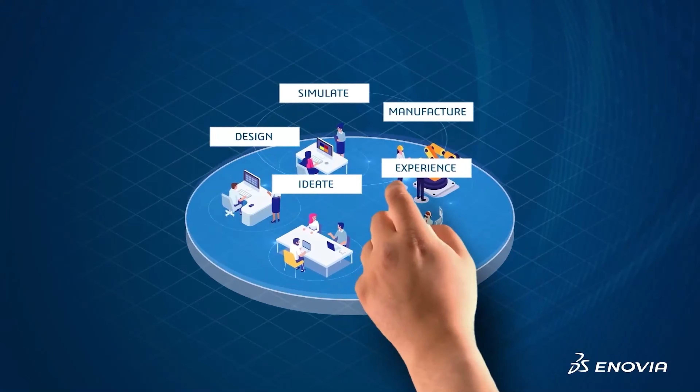With those intelligent links in place, each of your teams, whether that's mechanical or electrical design, software, manufacturing or simulation, work from a common product definition, which can help you improve quality, reduce costs, and deliver sustainable innovation. ENOVIA in the 3D Experience gives you an accessible way to get started in the world of data management on an industry-leading solution. It's worth mentioning now that the 3D Experience isn't your typical PDM solution. It's an all-encompassing hub of business applications that PDM's just a small part of.

With the platform, you'll have the potential to expand into other areas, all within the same solution as your business needs evolve and change over time. You'll be able to leverage your data with requirements management, project management, business analytics, simulation and production planning as just a few examples of the functionality that'll be at your fingertips. But before you can start taking advantage of all of that, what we'll focus on in this demonstration is an overview of the data management solution itself. That's the usual starting point for businesses like yourself moving to the 3D Experience.

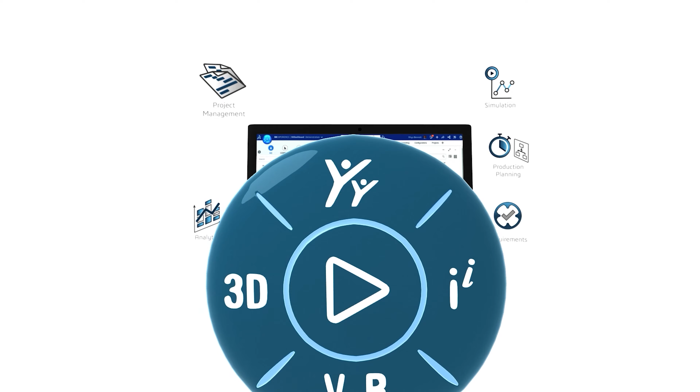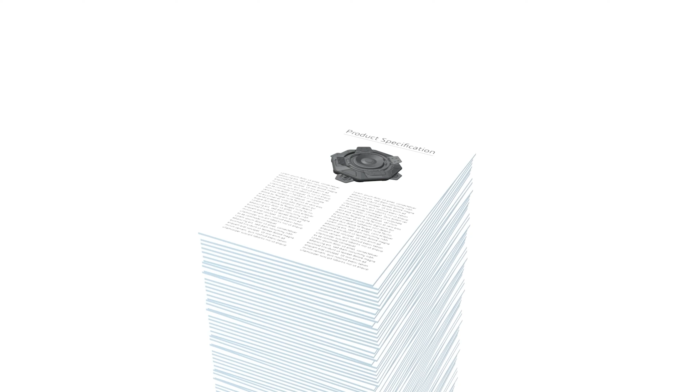In particular, we'll take a look at document management, where we'll cover life cycles, checking in and out of files, version and revision control, inbuilt viewers, and the where used functionality. We'll then have a look at CAD management, where we'll focus on the SolidWorks integration, and then we'll see how approving and releasing data is done in the platform with routings and workflows, or alternatively, formal change management.

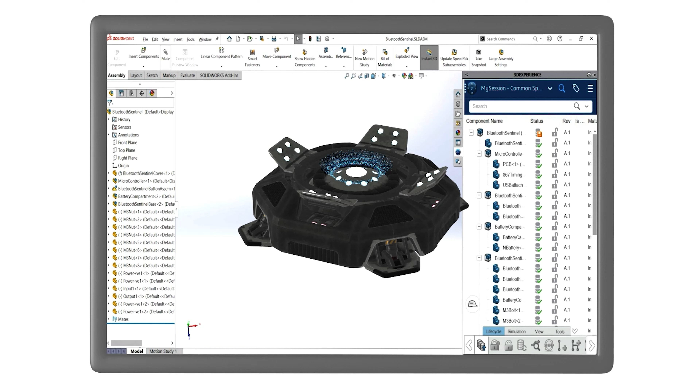Having touched on formal change, we'll then put that into context to show how changes can be used to resolve issues that users can raise in the platform too. We'll also show how the platform manages bill of materials with its unified product structure methodology. And then last up, there's some ancillary collaboration functionality in the platform that we'll run through as well. Okay, so let's get started.

Inside the platform, you access all of the distinct pieces of functionality as applications and widgets. You get to these by clicking the 3D Experience compass in the top left corner of the window. If you select an app, it'll open up in its own tab in the browser. But you can drag and drop widgets, which are differentiated by this little arrow, onto custom dashboards to configure the user interface that suits you best. The first widget that we're going to take a look at is the document management widget.

The document management widget gives you all the functionality you'd expect when it comes to document creation inside the platform. You have the option to simply click the new document icon, where you specify your document's title and description, and then drag and drop the associated file into place. Or you can drag and drop the file directly into the widget, where the document's title is transposed from the file name. You can drop any type of file you like against the document that you're creating, whether that's a Word document, a PowerPoint, a video, a graphics file, or a zip folder. Whatever you need to store against the document, then the platform can handle it.

So having created the new document, you'll have visibility of it alongside every other document that you've got access to that's managed in the platform. Now that's a bit different to your usual user interface, like you'd find in Windows Explorer for example, as everything's in one place rather than being broken down into folders. The reason for that is you're able to use the platform's comprehensive search functionality to filter down the list to find exactly what you're after.

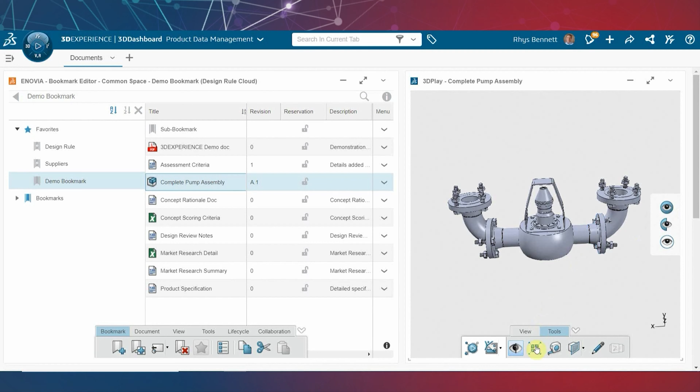The viewer handles documents or CAD, and with CAD you can turn the visibility of parts within an assembly on and off, explode the view, take measurements or cross sections, and even add annotations.

But what we'll do now is open this CAD directly in our native CAD solution, which in this case is SOLIDWORKS. Once the assembly's opened up, you'll notice a new 3D Experience task pane that you're able to select. From here you can navigate to the compass and select apps that you can use alongside your CAD.

But in this case, what we're going to look at is the CAD data that you have open in this session. So with the assembly structure you've got opened, you've got access to a menu that offers you all the platform-based actions. Things like saving back to the platform rather than saving locally, reserving or locking a part or assembly to yourself to stop other people working on it when you're making changes.

You can replace elements in the hierarchy with different revisions you have stored in the platform. You can view the maturity state of any selected part, and then as you'd expect, you're able to create new revisions, branches, or new revisions derived from branches.

The status column against each assembly and part in the hierarchy also gives a clear indication of whether any updates made locally are synchronized back to the platform, the green tick showing it's up to date, whereas the yellow save icon shows that the file's been modified in your current session.

One smart bit of functionality that you can use straight out of the 3D Experience task pane is using the platform's search functionality to find additional parts or assemblies to add to your session. Using a search term will return everything in the platform that meets that criteria, which won't exclusively be CAD. So what you can then do is filter these search results as we've seen before with the platform's tags.

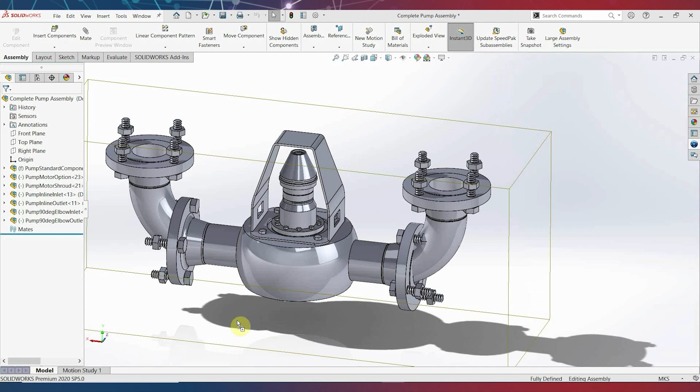Then it's just a matter of dragging and dropping it into your window and mating it into your structure like any other part. If you want to save any changes you've made back to the server, you click Save or Save with Options. Save with Options allows you to reserve any modified files to your user, which you'll need to do to propagate any changes back to the platform.

You can specify a bookmark which you'd like your CAD to reside in, and you can create a new revision too. Now this is where your major and minor revisioning comes in. If the maturity state of the CAD you're revising is in a released state, then when you create a new revision, a new major revision will be created and reverted back to the in-work lifecycle state. So A at release state, if revised, would become B at the in-work state.

However, if you want to create a minor revision, sometimes referred to as a version or a secondary revision, then the maturity state of the CAD you're revising would be in the in-work state. This would turn your A-1 revision at the in-work state to an A-2 revision at in-work state as well.

The reason for doing this, as opposed to automatically applying a new minor revision on every save, is because if you don't do that, you can end up needlessly eating through your storage capacity, especially if you're working on big and complex assemblies. This methodology gives you the option to retain the important steps along the history of the changes you make to your CAD, as opposed to a rule enforcing a minor revision being captured every time you click Save.

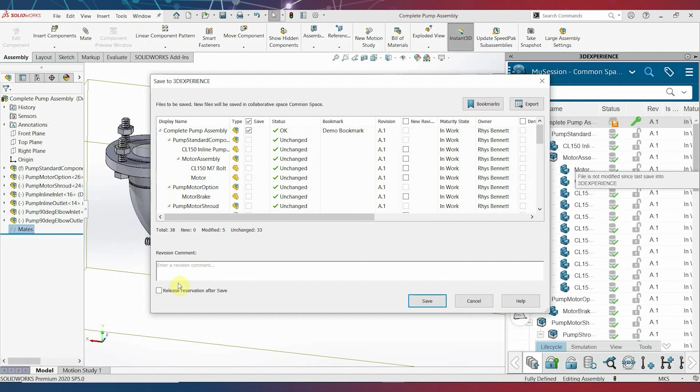You also get the option to save a comment against the revision to help clarify any changes you've made that you'll be able to see in the revision history. And you can release any reservations you have on the hierarchy on the save here as well.

With the CAD synchronized back to the platform, what we can now look at is how you promote those parts through their life cycle. So you'll see at the moment they're at the in-work maturity state. To get them to the release state, as with most things in the platform, there's a few different options you have available to you so you can match everything to your existing release process. So with that in mind, we'll now take a look at the first and simplest option of how we'd go about promoting a part in this structure.

We simply select the part, go down to the lifecycle menu and click Release. Simple enough. And the user account of the person that's logged into the platform who clicks Release is recorded as the promoter in the part's history.

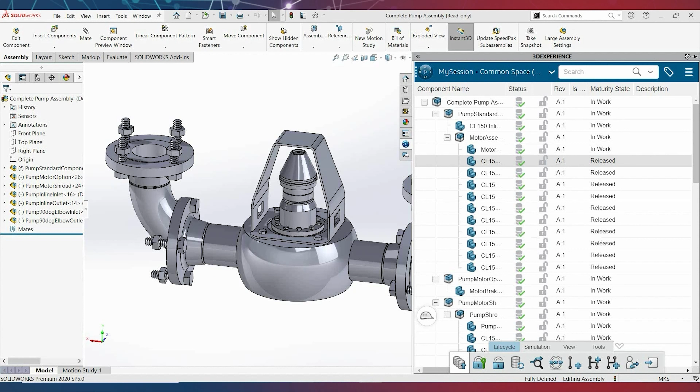Now the next option is pretty similar, but there's one notable difference. When the user clicks Promote, what we can do is enforce an approval routing or workflow on the transition between lifecycle states. For this, what we first need to do is define the routing itself. We can do this with the Route Management widget. Here you'll be able to create a new routing or revisit routes that you're the owner of.

Once you've opened up your routing, defining the steps is easily done by clicking the plus icon to add a task. You can add parallel or serial tasks, assign users to them or user groups, which you can define in the user groups widget. You can apply any or all conditions for parallel tasks, and then you can define the task name, expected actions, instructions, and whether or not to allow delegation.

When a route's actually underway, the first tasks in the routing are issued to the assigned users inside of the platform, and they're able to update and complete them from the Collaborative Tasks widget. You either click on the task and update the details, or you can drag and drop the task between statuses. When one task is complete, the next task in the approval routing is issued.

With your route defined, you'll then be able to clone it into a route template from the Collaboration and Approvals app. That means you'll then be able to use your defined route as many times as you need. To open the route in the Collaboration and Approvals app, what we can do is search for the route name. You then filter the results by routings, select the tick box next to the route and pick the app from the compass.

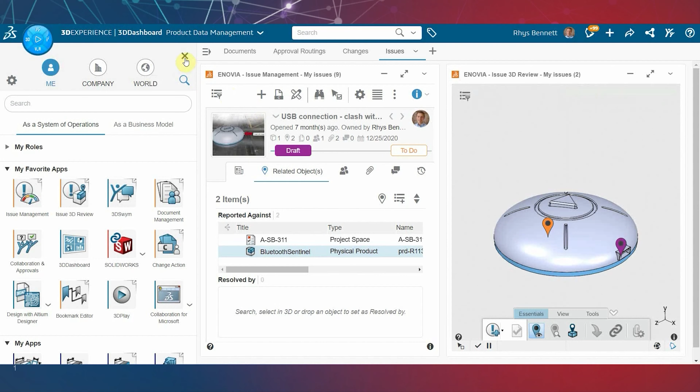There's also a Resolved By field here too, and that's where we can connect a change action intended to resolve an issue to the issue itself. If the change action's already been made, then you could search for it and drag and drop it into the field, or alternatively, you're able to create a new resolving change action directly from the Issue Management widget.

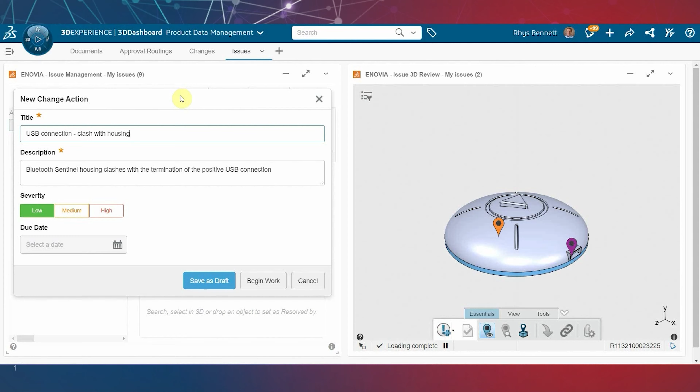So these changes, as you can see, can be used to resolve issues, but changes can also be used to release parts within your assembly. The best way to visualize what's been released within your design is with the Engineering Release app. The app creates a product structure driven by your CAD, but you can add other engineering items, consumable materials, documents and drawings to this structure too, as well as configurations.

Configurations like this are driven by matrix or expression rules that you define, and then they can be applied to your product structure as a filter. That means you can have every option and variant in a single master structure, which you might hear referred to as a 150% resolved BOM. And then you filter that structure down to reflect the application you need it for. You're then able to view the filtered down product structure directly in the 3D Experience Viewer apps.

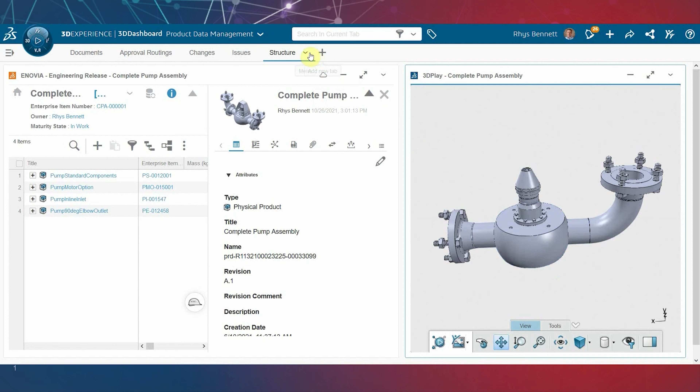So that's a quick overview of ENOVIA's data management functionality in the platform. What we'll now take a look at is some of the more ancillary functionality that you get in the platform as standard, that's designed to help you communicate and collaborate with the people in your business. To access this, you can go over to the Communities icon in the toolbar. Here you'll have two tabs to look through.

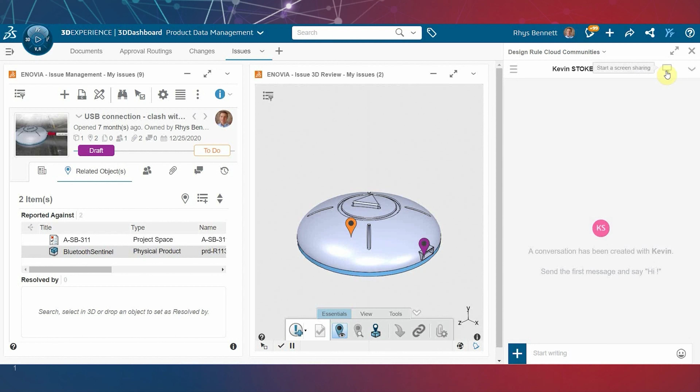The one we'll look at first is Conversations. This is the platform's inbuilt instant messaging tool. You're able to start conversations with anyone you're connected to, host meetings with up to 14 different connections, and you can audio call, video call, and share screen as you'd expect. Platform conversations are stored in the platform as any other object, so you can search through these and add them to favourites for quick reference as well.

The Communities tab is a little different. It allows you to create user communities that have access to a community wall. The wall lets users communicate in a way akin to social media. You can post standard posts, media, simple tasks referred to as we-dos, ideas that are managed in an ideas funnel, ask questions, publish wiki pages, and promote surveys to the community as well.

All of this content can be liked and commented on by community users, so you can gauge how well a post has been received. And in the instance of idea posts, their icon will actually appear larger in the ideas funnel, dependent on how many likes the idea has received from the community.

So hopefully that's given you an insight into the functionality that you have available to you from a PDM perspective, moving to the 3D Experience. But what you need to remember is that the big differentiator with the platform is that you have the potential to leverage all of this data to a huge amount of other business applications and widgets that are hosted inside of the 3D Experience. Whatever your business requirements are for a new process or a bit of functionality in the future, the wealth of functionality available directly inside of the platform is sure to be able to address it.